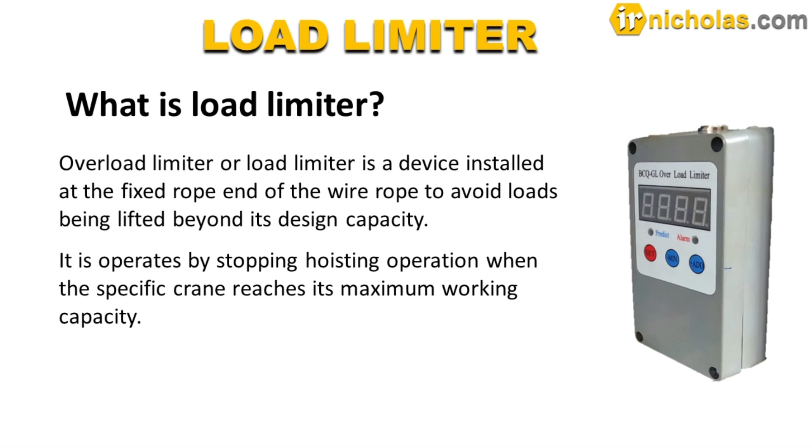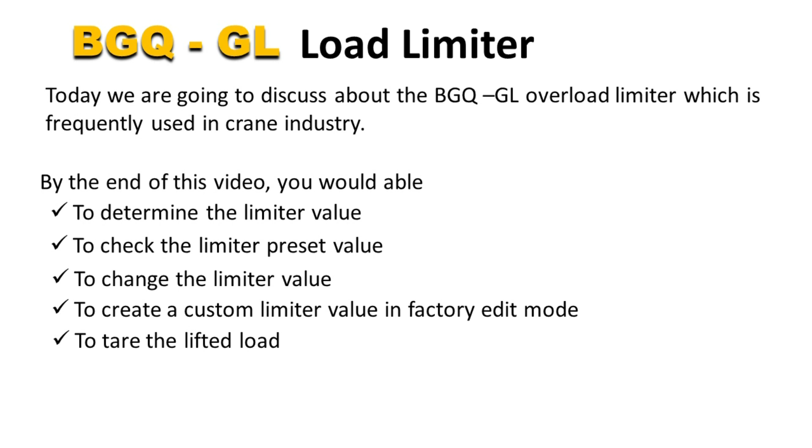Today we are going to discuss the BCQ-GL overload limiter, which is frequently used in the crane industry. By the end of this video, you will be able to determine the limiter value, to check the limiter preset value, to change the limiter value, to create a custom limiter value in factory edit mode, to tare the lifted load, and to perform precision calibration.

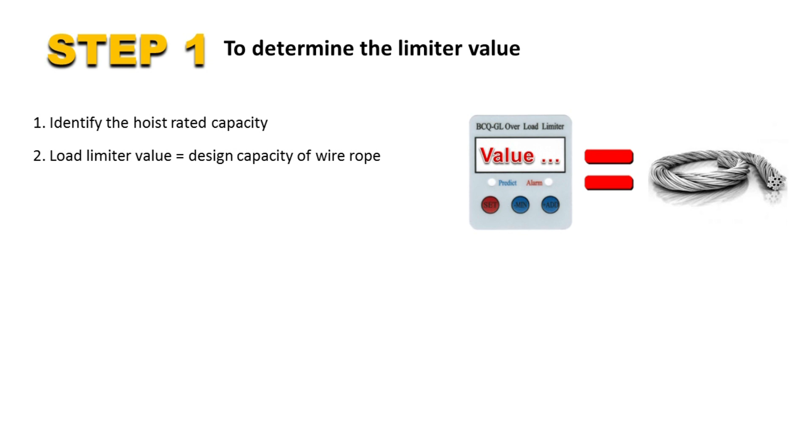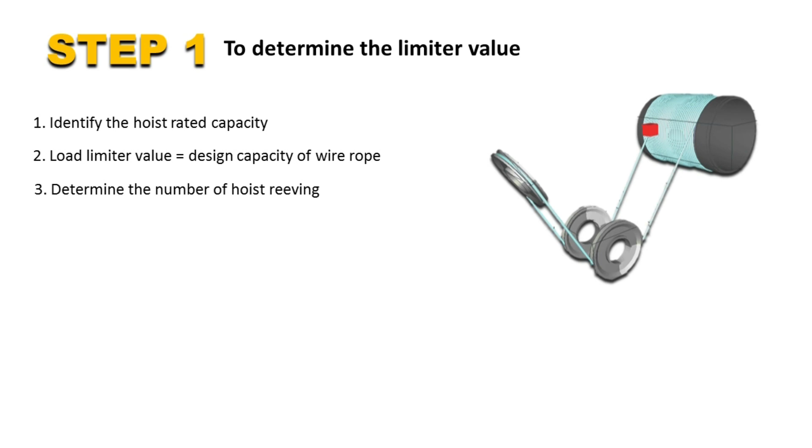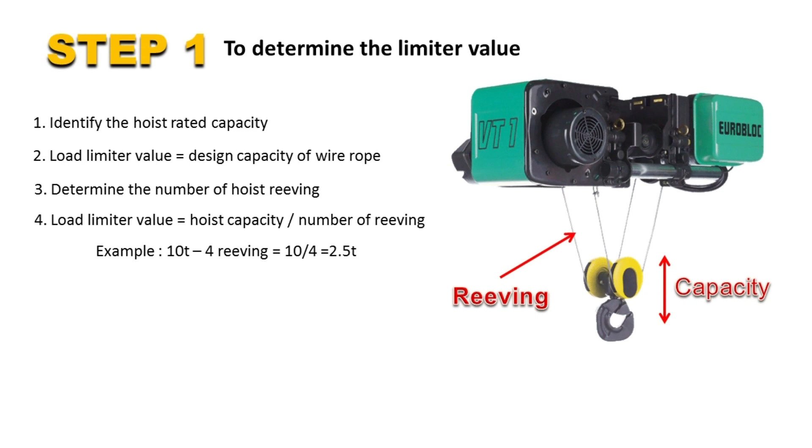Step 1. To determine the limiter value, first, identify the hoist rated capacity. The value displayed on the load limiter represents the design capacity of the wire rope. Then determine the number of reeving available on the hoist, whether it is 2, 4, 6 or 8 reeving. Hence the load display value is obtained by dividing the hoist's capacity by the number of reeving. For example, if you have a 10 tons hoist with 4 reeving, you will be dividing 10 by 4. Thus the value to set would be 2.5 tons.

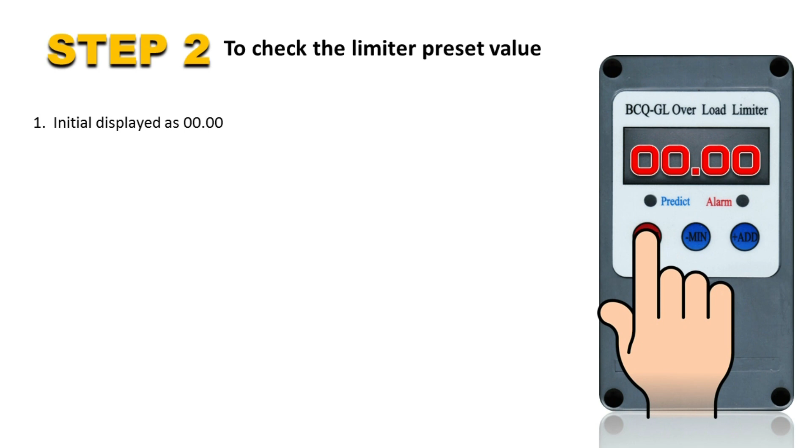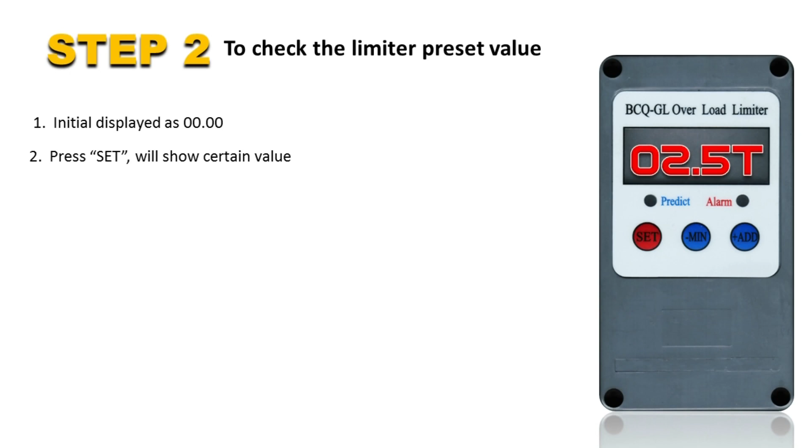Step 2. To check the limiter preset value, initially the load limiter will display 00.00. Press set, and the load limiter will display a certain value. If the value is 2.5 tons, it means the design capacity of the wire rope would be 2.5 tons.

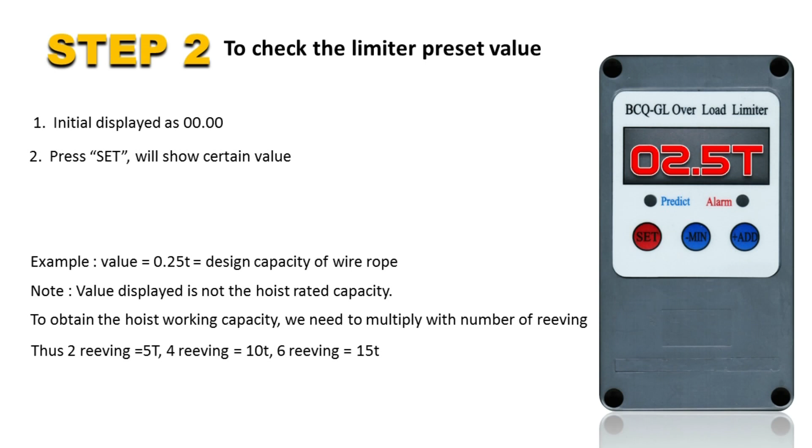Please take note that the 2.5 tons displayed is not the hoist rated capacity. To obtain the working capacity of the hoist, we need to multiply the value by the number of reeving. Thus if it's 2 reeving then it's a 5-ton hoist, if it's 4 reeving then it's a 10 tons hoist, if 6 reeving then it's a 15 tons hoist, and so on.

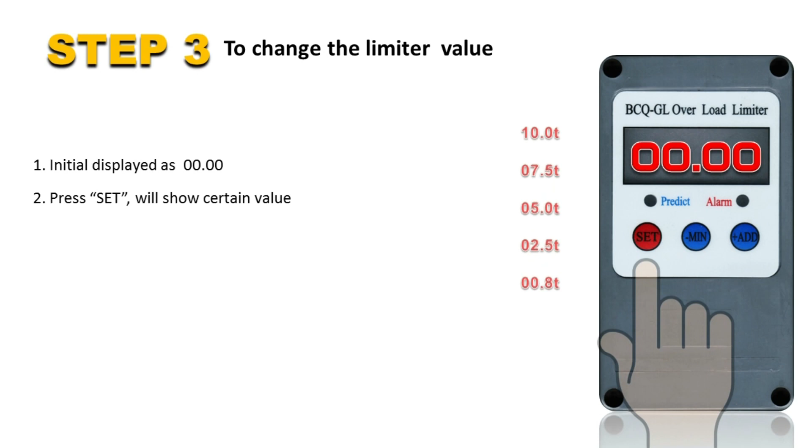Step 3. To change the limiter value, as usual, the load limiter will display 00.00. Press set, and the load limiter will display a certain value. The first value displayed would be the latest load limit value keyed in the previous setting. Now by pressing plus (add) or minus, it will show a list of default load limit values set by the factory. We can select the value by pressing add to increase or minus to decrease.

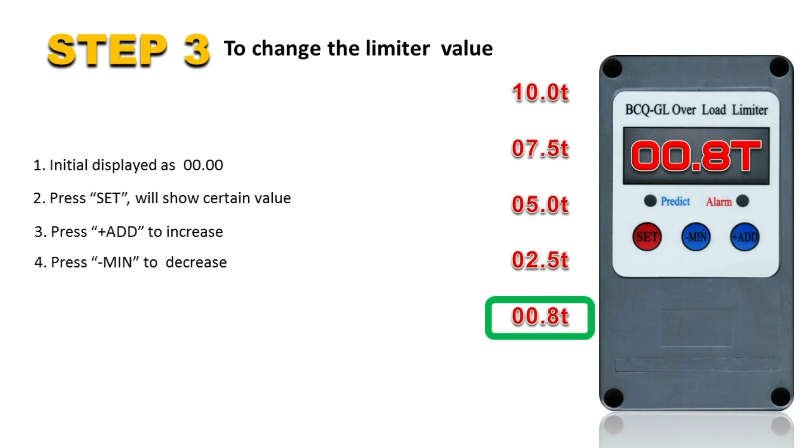Choose the nearest wanted value. Then press and release the set key again to save it. However, if you are unable to locate your wanted value from the factory default settings, you may create a custom value in factory edit mode, which will be explained in the following step.

Step 4. To create a custom limiter value in factory edit mode, press both buttons set and minus together and release. It will enable the factory edit mode. The display will change to 99.9 tons and one of the numbers will be continuously blinking, which indicates it is ready to edit. Press add to toggle between the values of 0 to 9.

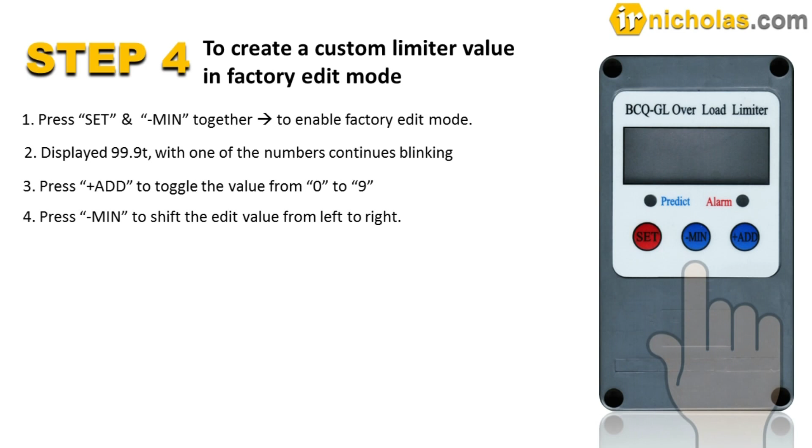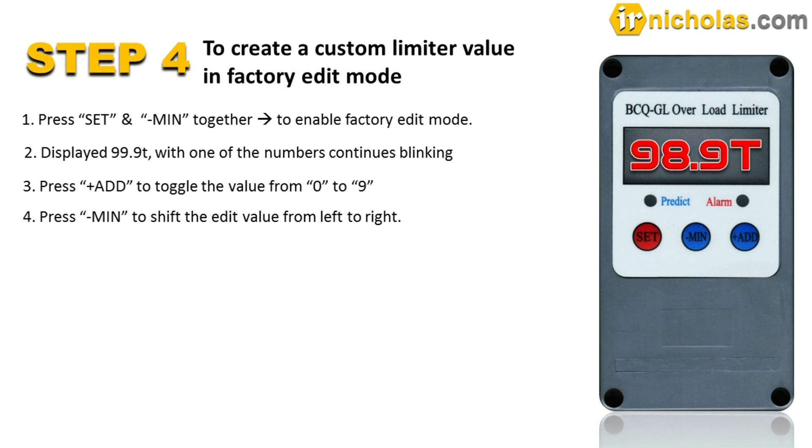The minus button is to shift the editable value from left to right. Now we can set any wanted custom value other than the factory default value.

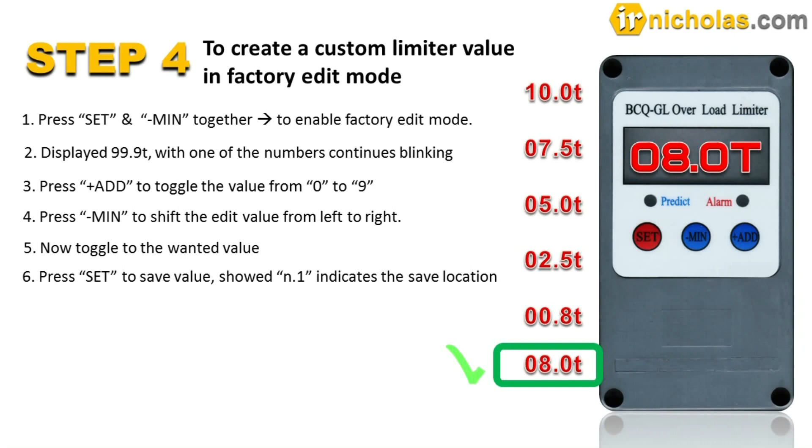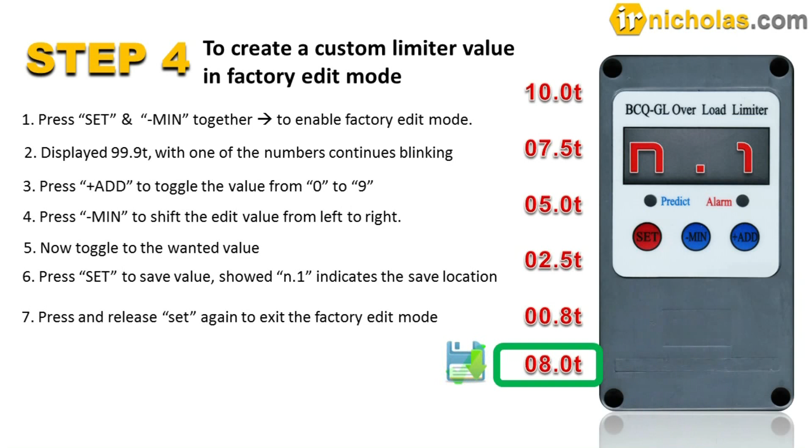After setting the wanted value, we have to press and release the set button and it will display n.1, which indicates where the value will be saved. Press and release set again to exit the factory edit mode. Now this new custom value will be available in the default load limit values list. You may go to the earlier step 3 to change the load limiter value to your wanted value from the list.

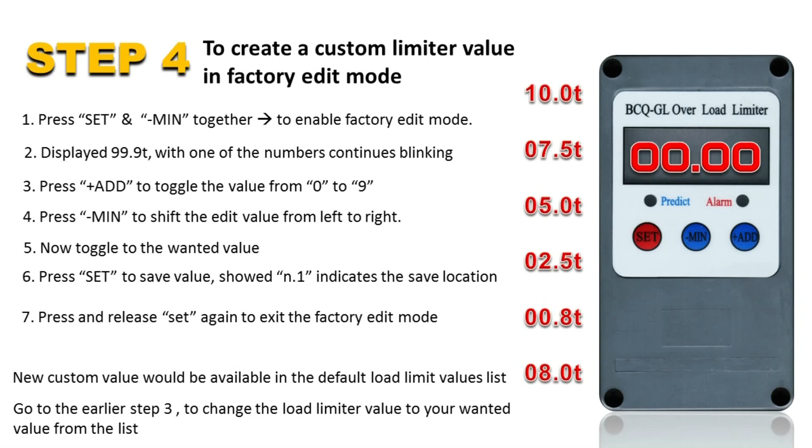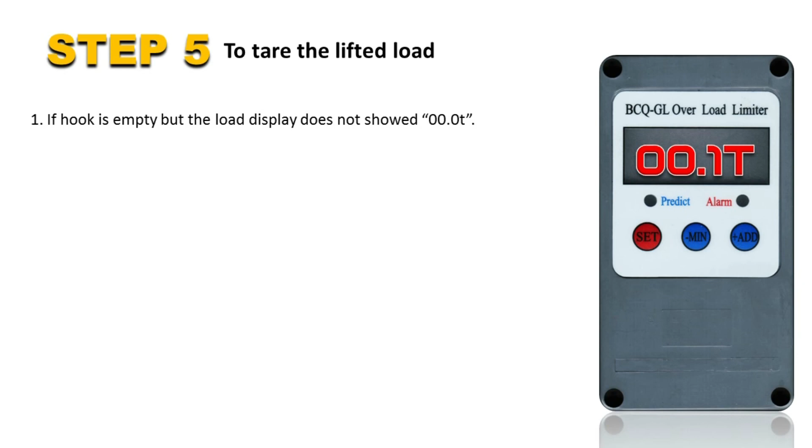Step 5, to tare the lifted load. Whenever the hook is empty but the load displayed does not show 00.0t, press the set key for a few seconds, and the value will return to 00.0t automatically.

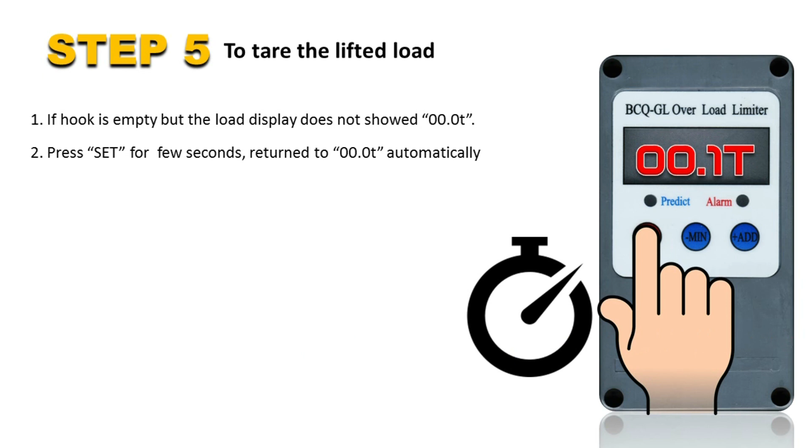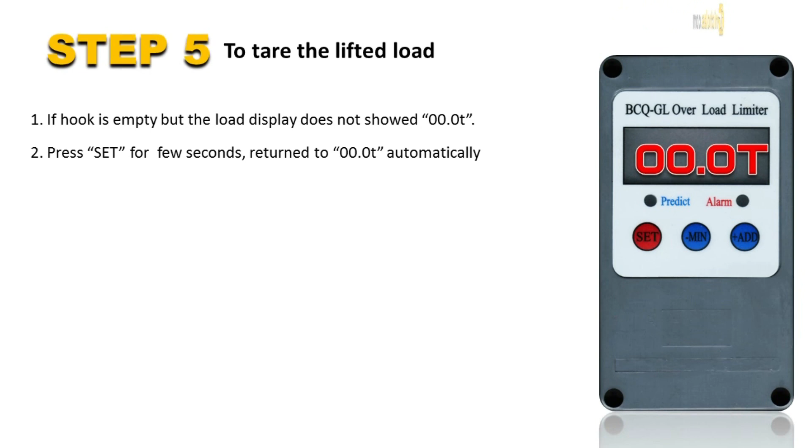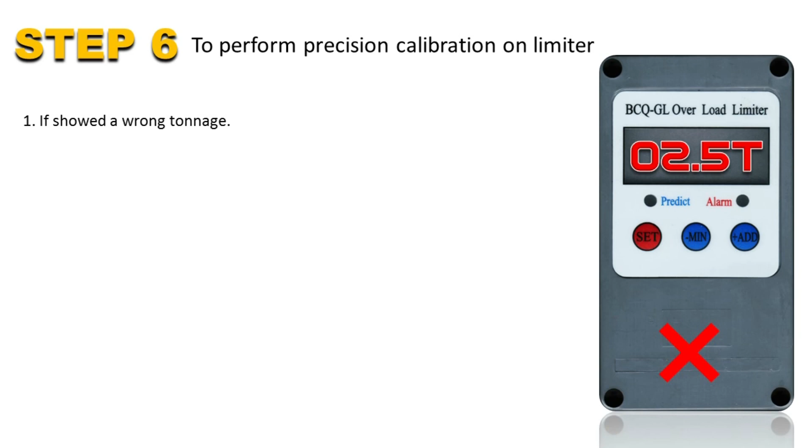Step 6, to perform precision calibration on the limiter. If the hoist lifts a load and it shows a wrong tonnage, we can adjust the value by pressing add to increase or minus to decrease, without pressing the set key at the beginning. Adjust until we get the right value. Wait for 5 seconds, and the instrument will auto-save the corrected setting.

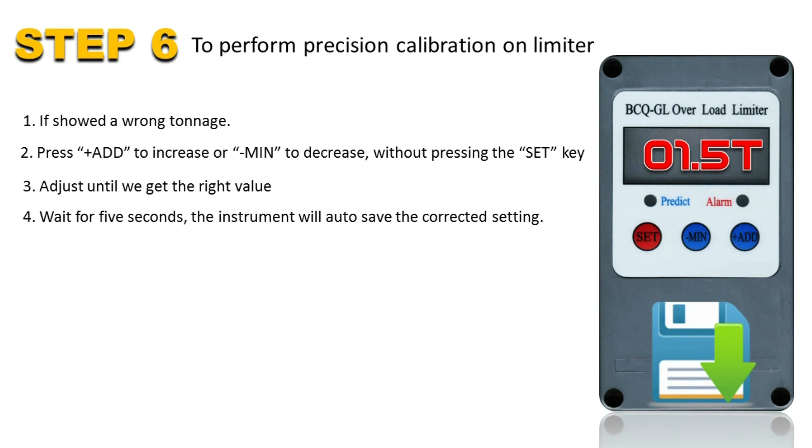Okay, that is all about the BCQ-GL overload limiter.